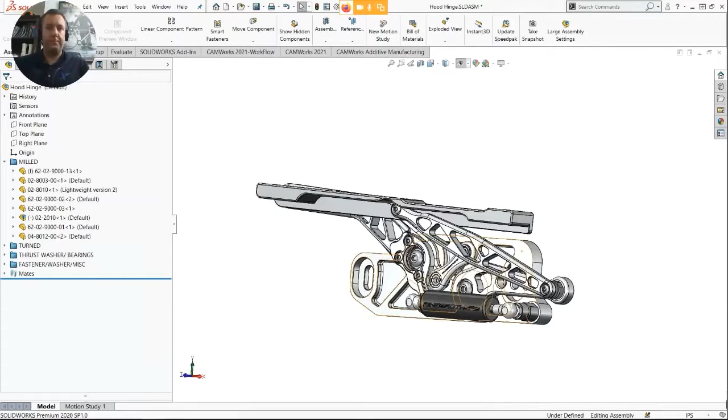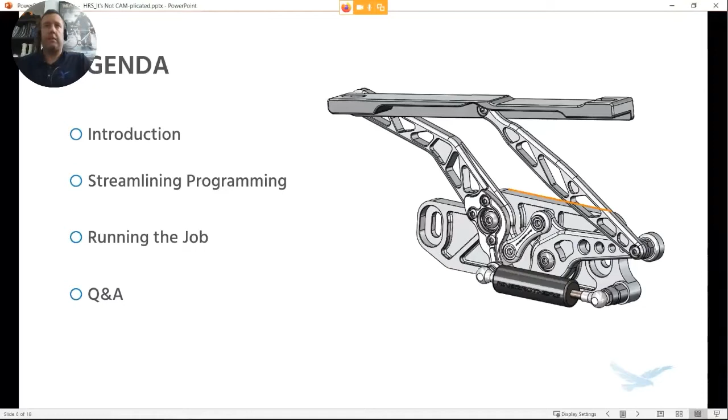Now, we're going to go through a few different areas of streamlining the programming and running the job, and looking at where we can save time in both of those areas. If we have time right at the very end, there'll be some questions and answers. If you have questions, you can ask them anytime during the presentation in that Q&A section, but if there is time at the end, we'll address any questions that have come up there as well.

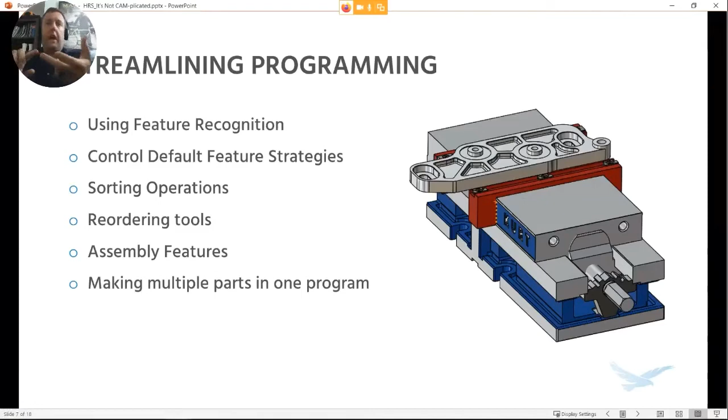So what are we going to look at now? Tim's going to walk you through using feature recognition and controlling default strategies. How do you sort operations quickly so you can minimize tool changes and structure your programs a little quicker? How can you resequence your tools? What are assembly features? And how do you make multiple parts in one program?

And then we're going to look at the running the job side of it. So how do you optimize cycle times using a new product called Eureka Chronos? How do you reduce the program size, and what methods and steps can you take to do that? How do you verify your actual toolpath is correct offline without having to tie up the actual CNC? Looking at actually programming with some variables.

Looking also at how you load programs from where you're working to the CNC, and how you can get the actual programs onto the control. And then looking at machine data collection and what we can do with that. So I'm going to hand it over to Tim, and he's going to take it from here.

Okay. We're actually going to turn our videos off to save on bandwidth while we're running these big models here for you guys live.

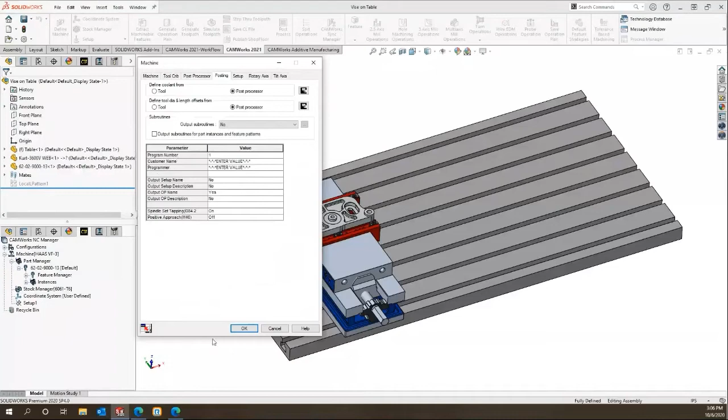So choose that - I'm going to set the stock manager next. This is where you get into some of the new features inside SOLIDWORKS CAM and CAMWORKS. This is the basic bounding box we've always had. Down here you have a predefined bounding box - I just have the default set as 1 right here because you can load whatever you want.

I didn't want to load a bunch of them and all of a sudden you guys open up your computer and it's not there. So I wanted to go through here - you can set your default, set your length, set your width. If you use a lot of 2x2, 1x3, whatever the case may be, you can actually set that information.

Another one of my favorite ones here is a cylindrical circle. You used to always have to take and set up a circle in here with a sketch - put the sketch in, then choose it as your circle. Now it just defines that, and you can modify this however you want, bigger, smaller, whatever the case may be. So for this one, I'm going to run this.

A trick here - a lot of people will go through and put different things in. This button is live, so if I put 0.1 in there and pick here, you can see it actually puts it on both sides as I'm doing this. So the game today is I'm going to show you what's new, and I'm going to show you a few tips and tricks along the way as well.

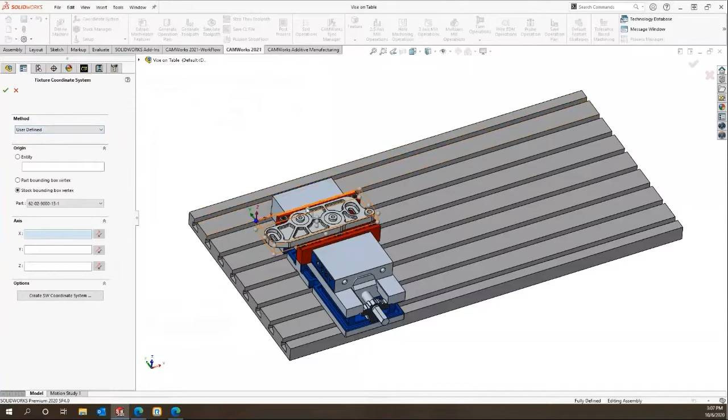Hit OK there. Next thing, my stock coordinate - I can choose just user defined, I can pick anywhere where these dots are, I can use a SOLIDWORKS coordinate, anything I want to set up any information inside this area as well. So I hit OK at that point.

Now the idea with the whole feature recognition is just to extract machinable features. If you go across, this one's lit up, this one's grayed out. As I push on this one, you'll now see it start going through the features - it's analyzing the pockets, the holes, the bosses. It's looking at the SOLIDWORKS feature tree and trying to figure out if I used the hole wizard to tap any holes.

So it's putting all that information in right now. And you can see I get a face feature, right? I get a perimeter feature.

One of the things I want to point out here is I get this default, which is rough and finish. In the past, you always had to right click, go through, go to the parameter, and come over here to pick the parameter you wanted to change it to rough and finish.

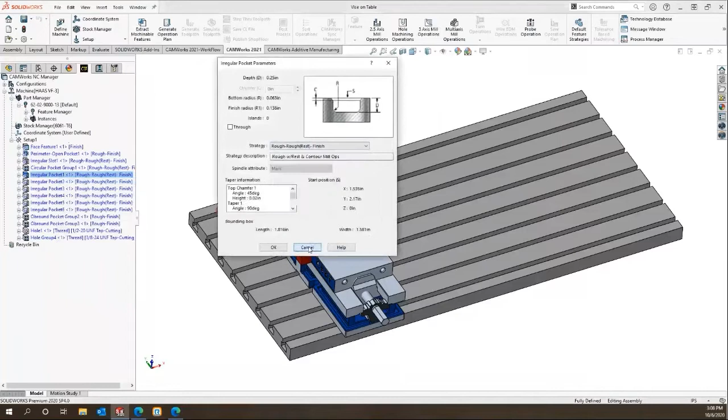So everybody had to do a shift, hold, whatever the case may be, to get through that. So what you can do now is just come up here to the default feature strategies and pick on this icon, and then you can go through and see how everything's all set up.

Everything that's in bold is what's being used over here on this side. So if I take my circular pocket, I pick it, I go to rough and finish, I take this one that's bold, rough and finish, and I can do this one as well. You can set these as your defaults ahead of time.

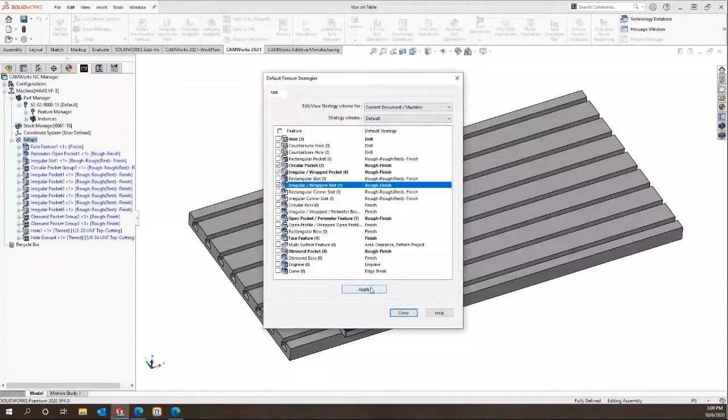I wanted to show you backwards in case you forgot, so you'd be able to quickly go through and change those. But you can apply these and save them to the database however you want inside here. I'm going to hit apply. Everything changes automatically, so definitely a time saver there.

Now what I'm going to do is pick the next icon. The other two are still grayed out here, right? I'm going to generate an operation plan.

So now it's going into the database and figuring out, based off an irregular pocket, what size tools will fit inside here and what can I apply. It's analyzing the size of the pockets, and it's also analyzing the tool crib and applying those tools. You can see it's got a rough and a contour, a rough and a contour, right?

The reason it does that is because back on this page over here, it says irregular pocket, rough and finish, irregular pocket 2, rough and finish. So you can drag and drop whatever you want in your certain order here.

You can also pick on the setup, and then by picking on the setup, you pick the sort operations. I just grabbed the sort button here. And if I want to do the face first, maybe the rough second, and then the contour third, right?

Leave the rest as the defaults. I hit apply, and you can see my screen now changes and it puts it inside there.

So now it's going to save all those tool changes. It's going to put the one tool in and do all the work, next tool in, do all the work. I'm going to hit OK now.

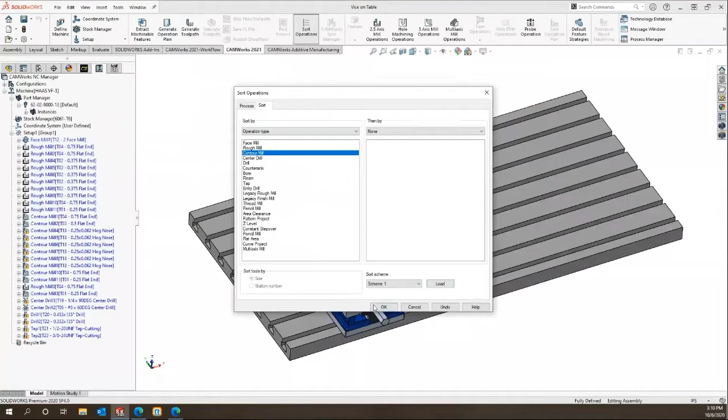And at this point, I can actually set up and generate my toolpath. If you notice, it's the next one that's become available now. So I'm now going to generate my toolpath, and then there's my toolpath now to run that model.

These toolpaths are defaults out of the technology database. You can customize the technology database however you want. If you like just doing it on the fly, like every other CAM system, you're more than welcome to do that. I can double click here.

And then I can choose what I want to do, right? I can change the tool, I can go to feed rates, I can go to operations. Everything becomes available, I can uncheck check marks.

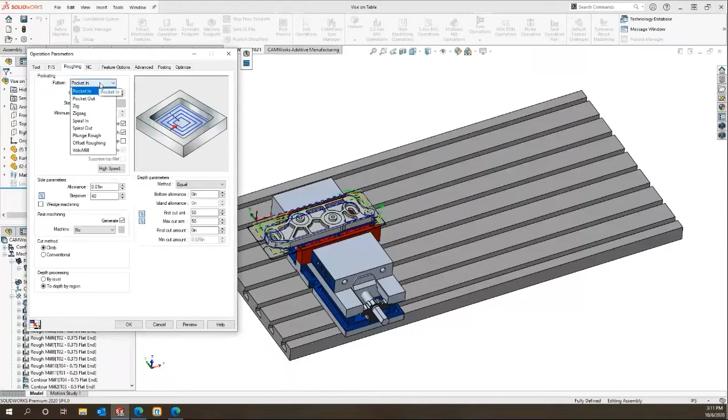And now I have information down inside there: my roughing, pocket in, pocket out, zigzag, spiral. It's all available just like anything else. So how I got there, I just double clicked on here and then I was able to make those changes.

So now if I wanted to simulate the toolpath, that's just the next button here. I pick on that and it launches the simulator. So you have different options.

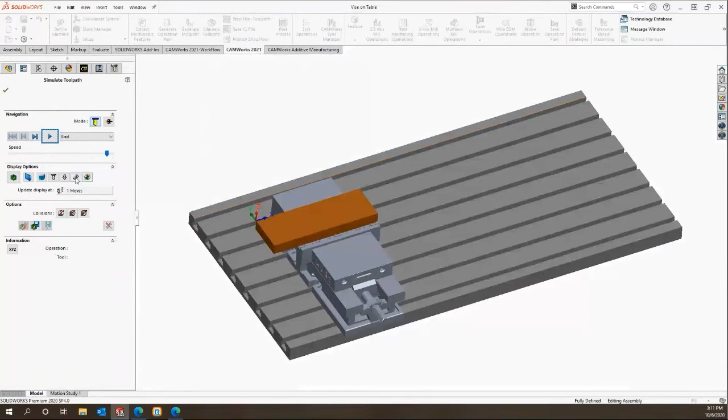I can see the part in here. I can go in and maybe I don't want to see the display, I can turn those on and off. So you have lots of options when you're actually running the parts inside the environment here.

So I can take that and just hit the play button, and it starts running my information and doing that inside there. I'm going to hit the checkbox now.

Now, one thing I want to do, we've got this new probing routine on this new machine we just purchased, so I want to be able to probe the part while I'm running it. So if I right click here, and I can do it anywhere, I can also right click at the bottom.

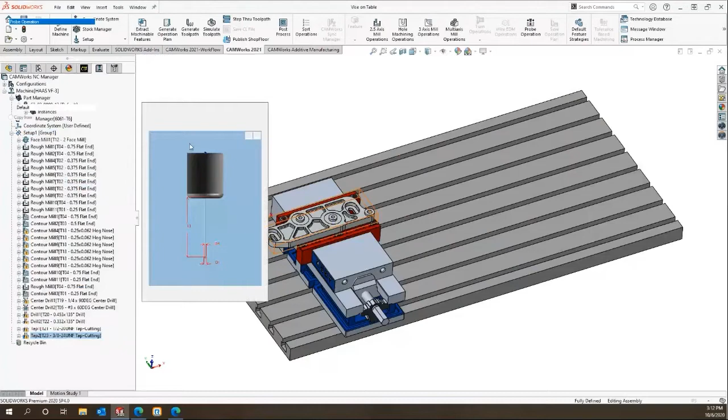It doesn't matter where I want to do it at. I'm going to put in a probing operation, so I'll pick that. I have my tool and I can select other tools out of a tool crib, and get different sizes, whatever you want to do. Hit the checkbox there, and now it's going to open up the probing window itself.

One thing I've been told is you always have to put in an actual raw stock out of the SOLIDWORKS environment to be able to probe the corner. So there's a trick to that - you do not have to do that.

Inside here, the X and Y location, you can choose right here and it'll just select the stock. And what it does is put in the plane on the farthest outside part with that 100 thou that I put on there. So I can do the same down here - I pick on that.

Now I'm going to probe the center, but I don't want to probe the center - I just want to probe the left corner up here. So just like any CNC machine, I've got X positive, X negative. I just take the X negative or positive here, hit delete, and now it just probes the one side.

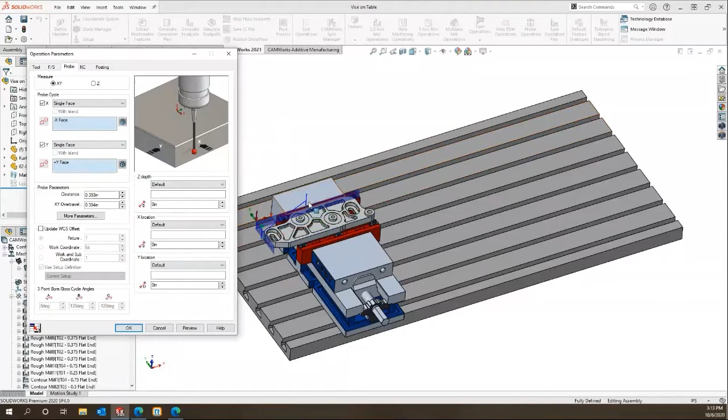I can do the same here, Y negative. Pick that, hit delete. And then I can move these wherever I want back and forth. So if I want to do the X, I just do negative 4 inches, and then it just comes back to the 4 inches of wherever it's going to be at. Very simple to do.

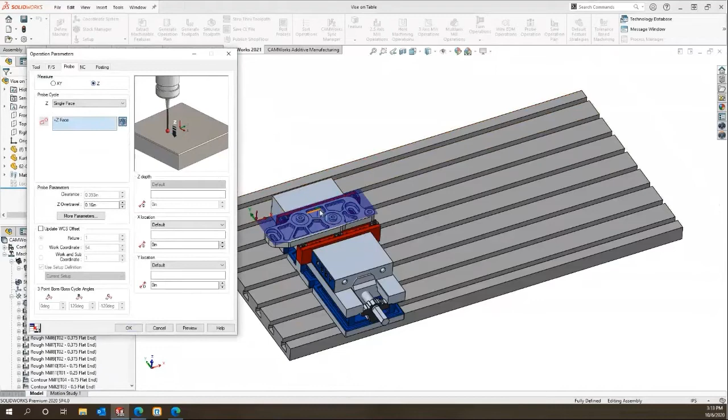And you notice it's set to X and Y right here. If I hit the OK button, now I can right click and insert another probing operation. Then on this one, hit the checkbox here, and all I want to do is find the Z. So I just pick on the top, same game - pick on the top here, and now it probes the top of the part. I can hit OK.

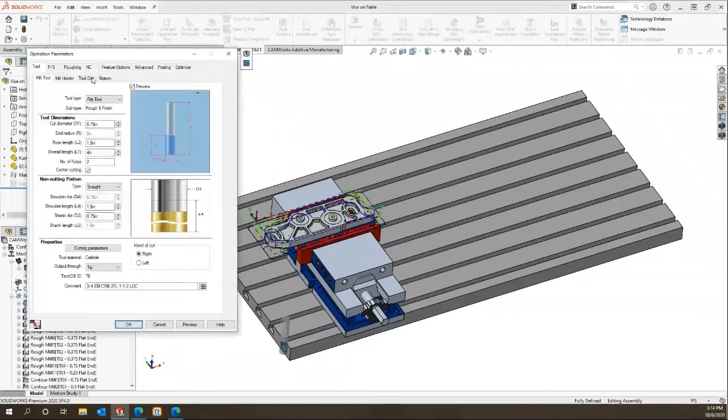One more quick trick before I turn this program back over to Daniel. As you can see, I have the probing all set up inside here. I can sort operations, or sort tooling, sorry. Sometimes people think you have to go in here and physically choose the tool - you have to go to the tool station here and change it to tool 1, tool 2, tool 3, whatever. If your machine is set up and these tools are in the right position where they're supposed to be, by all means, don't do this.

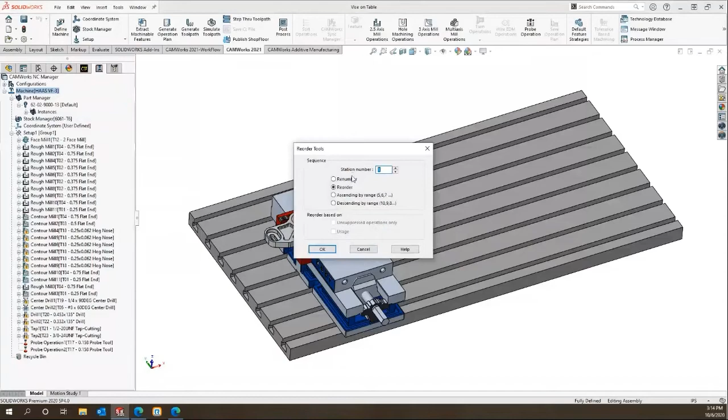But if you're just loading the carousel or whatever the tool changer is, the magazine, you can go through and get that all set up by just right-clicking on there. You can then go through and sort and reorder the tools. So if a job comes in, I can use tool 10 and up, or 5 and up - I'm just going to start at 1. And now I have tool 1 set up inside here with my face mill, as you can see.

Problem is my probe's at the bottom, so I still want to probe first. I'm just going to drag it, kicking and screaming, up here to the top. And now my probing is set up, and this program is ready to be programmed and run at the machine.

So hey Tim, that's pretty much a good job we're doing with that probing routine. I think we just took an order for 500 of these things, so we're going to need to take out every little bit of time we possibly can. I really thought we were just doing the setup, guys - I thought we were doing one. No, 500 apparently - sales guys going nuts apparently. Well, good for you then. You want to pass it over to me, and we'll see if we can take some time out of this. Yep, here it comes. Perfect.

So everyone should be able to see my screen now. I can see it. Perfect. So we've got Tim's program loaded up in a tool called Eureka Chronos. Now this is a new product. A few of you might be familiar with VoluMill. VoluMill is designed to optimize feed rates and remove a lot of material at one time.

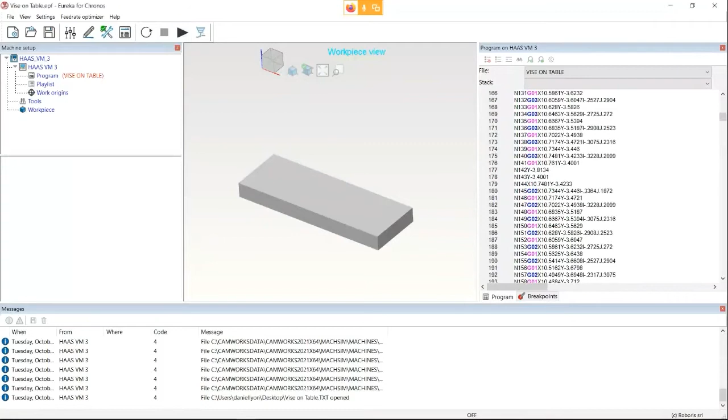What we're going to do here is take our program that's over here on the right that we just produced, and play that through here. Eureka is a tool normally built for doing machine simulation. But the nice thing they did with Chronos is they took the machine simulation and the existing path that you've got, and use this to check the actual tool path, to see if you're machining correctly, but also to make sure that you can optimize your cycle times.

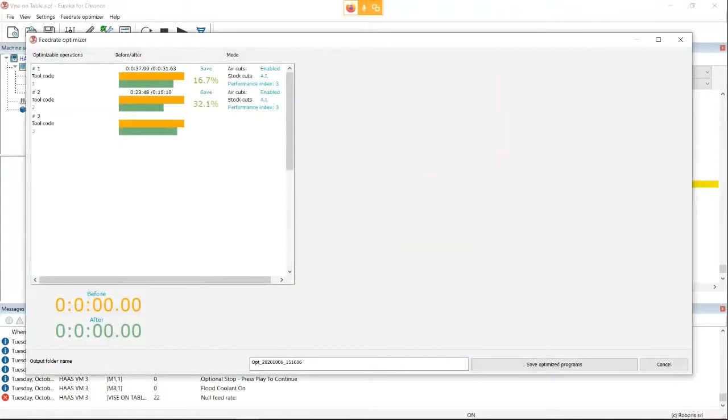Now, I mentioned VoluMill before. VoluMill is changing the tool path itself to be a different path based on the volume of material, so it's trying to optimize that material. What Chronos is doing is analyzing the actual G code that you feed it and looking at where we can save time by optimizing the volume of material that's being removed. Essentially the same thing that VoluMill is doing, but on every single path that we have.

So you can see on the left-hand side down at the bottom there in orange, that was our cycle time before. So at the normal feed rates for running this part, we've got a 41-minute cycle time. Now we can save 22% of that time by optimizing the feed rates. I'm just going to explain what it's doing. You saw Tim put in a face mill operation at the very first tool. Tim's tool one was his face mill.

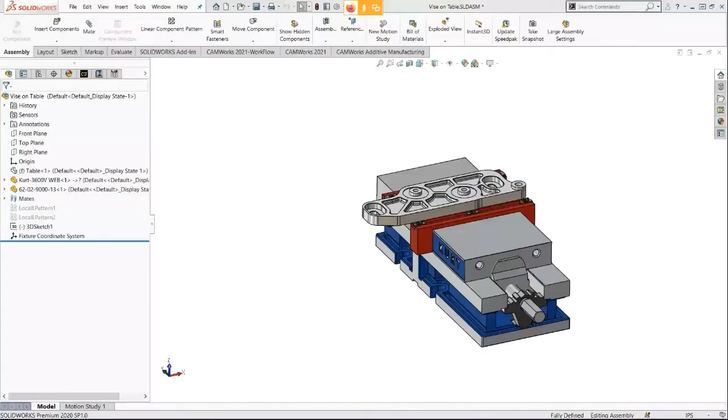You can see in the vise setup right here that we were doing a zig, then a zag, then a zig move coming across here. That corresponds to these three chunks right here. The orange section is before the optimization. The green is after the optimization. The bottom section is the volume of material being removed per minute, basically. So we do our zig move, then our zag move, then our zig move.

When you program these and lock the feed rates in, they're cutting at that feed rate throughout the entire cut. You might have a lead-in feed rate that's slower or higher, but as soon as you're in the cut, you're usually at a continual feed rate until the very end. The problem with that is, as soon as we come off the zig move and transition back to the zag move, we are essentially cutting air. So our volume of material drops.

But you'll see the orange line here. This orange line is our feed rate, the original feed rate in the program. You'll see that maintained its feed rate all the way through that pass. Now what Chronos is doing is going, okay, when you're air cutting right here, I'm going to optimize the feed rates by cranking up on them.

So it's going to use these numbers right here. We're cutting on a Haas, so we're going to set it to the Haas default. So 650, I think, is our maximum cut speed in a feed move. If I hit apply, we'll recalculate based on those new values. Now we're saving 15%, just in that one face mill operation. Tally that up across a number of operations, and you get a pretty significant time saving overall. So we're looking at volume of material being taken out and changing the feed rates to optimize that material removal.

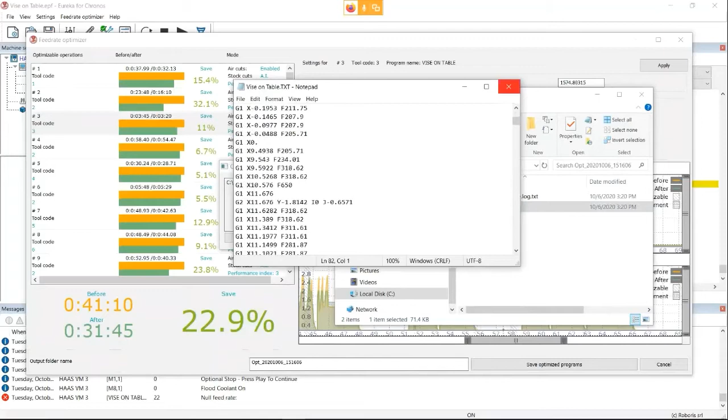Now, I don't think one part at a time is going to cut it if we're doing 500 of these, though. Tim, what do you think? No. Take a little bit more time. Yeah, you want me to reprogram it? Change this? Yep. Let's go ahead and reprogram it for doing the 3 parts instead of just 1. Did you say reprogram? Yeah. Is that not what you have to do? No. Dude, we're in SOLIDWORKS CAM and CAMWORKS. There's no reprogramming. Sit back and watch this.

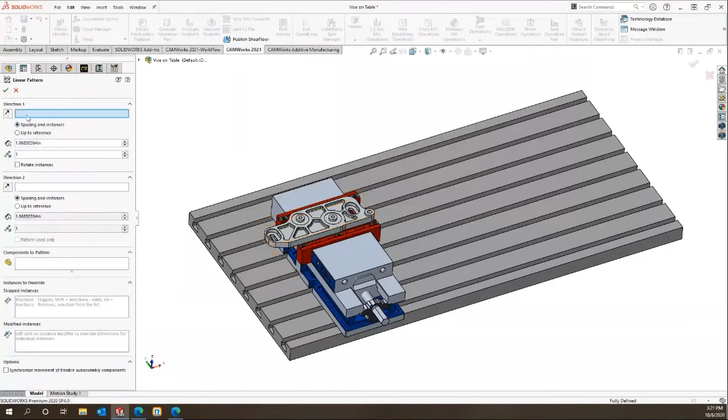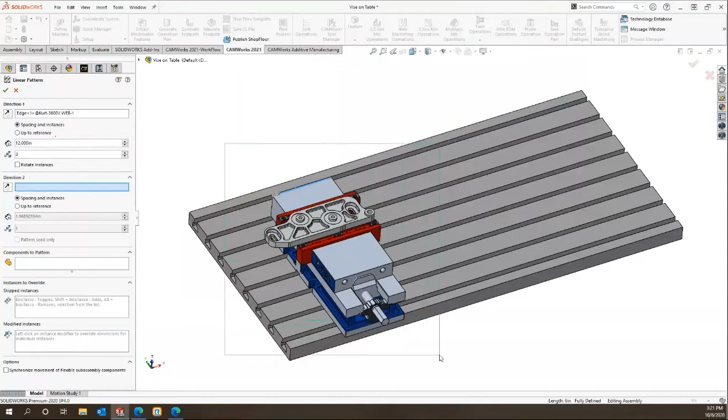Just going to go insert, do a pattern, linear pattern, right? What direction do I want to go? And this is SOLIDWORKS stuff, right? So I'm going to pick on this edge right here, and now I have my arrow going the right direction I want to go. Inside here, I'm just going to go to 12 inches. And I'm going to tell it how many vices I want. I want 3 total. Pick on that, and I'm just going to window select and grab those. Oh, I better pick down here first. Pick on that. And now I have the 3 parts going across there. So now if I hit OK, you can see I now have 3 parts, right?

Now we have the whole parent-child trick, right? So inside here, I'm going to go to Part Manager. I'm going to manage the parts. I'm just going to tell it that there's 2 more on the table. I'm going to select those. I'm going to hit OK. And then there is all your programming. So there's no reprogramming. We went from 1 part to production that fast.

So one thing I did think about, Daniel, is, when we're out saw cutting, I don't know if I want the saw person to go through and cut 3 different pieces. What do you think about just putting 1 piece in here? I think that's a good idea. Why have we got a CNC if we're not going to use it and we're going to have the guy cutting pieces manually by hand? There you go. That's what I was thinking.

So I'm going to go to the stock manager inside here. And then there's an option down here in the very bottom, right? I can choose all 3 of these. I'm just going to hold my shift key and grab these. I'm now going to combine the stock, change my instance here so it all becomes 1. And now I have 1 piece of stock to do the whole part.

So at that point, I can also change how I want to do things, right? I got my X here. I can set this to 0.05 on both sides this time. I'm going to try to save a little bit of material. This is still going to be the same because this is the raw material. And the Z will be raw material as well, so that will be the same. Hit the checkbox. And I get this new warning, right?

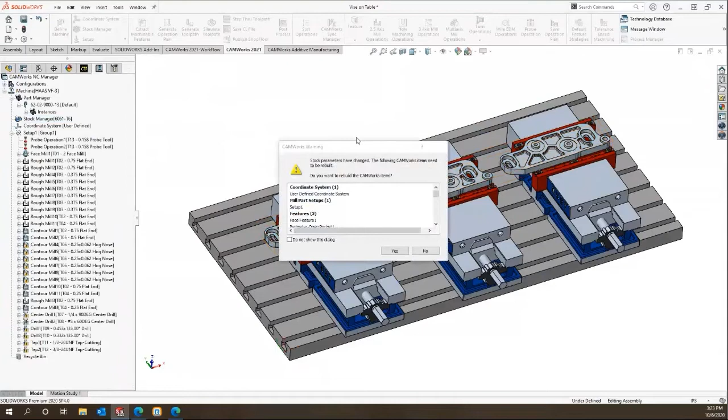This is in 2021. It says, hey, based off what you've done, you've moved the coordinate. So by moving the coordinate, there's a bunch of things that you need to change inside here as well. So I'm just going to hit the yes button. It's going to readjust my coordinate, and it's going to recalculate all my toolpath. And now my new toolpath is based off that coordinate.

One thing inside here is there's a face tool, right? A face tool, a face tool, and a face tool. So back in the past, you always had to kind of draw a sketch, and then you had to go inside here and you had to suppress the information that's set up. So what you can do is go up here in the instances and set this information. Let me go back to the right tree here. So I go back up in here, my feature tree, right?

And then here's my face feature to do that. And down here is all the 3 different features. So you used to right click and suppress, and then you could do what you wanted to do from there. A great feature: right click, assembly feature. So if you make it an assembly feature, it now takes that, and you've noticed down here, it turns it all to 1. So if you look inside here, when I double click on this, you will see my stock is now all 1 piece.

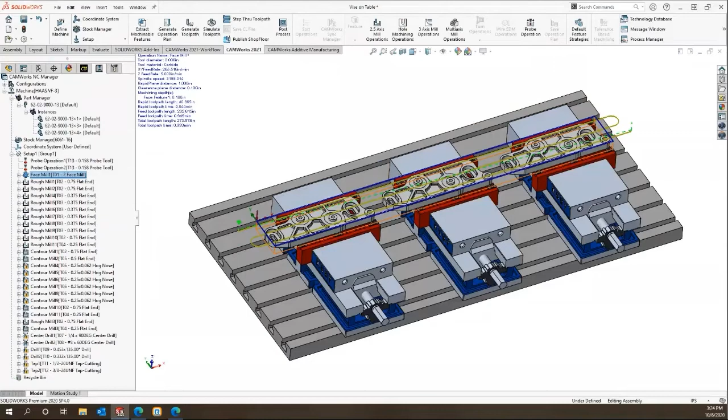My end condition remains the same. It's the 0.1 I had in it for the stock. I hit the checkbox, and now over here on the operation tree, you can see my face feature makes 1 pass across the whole part. So pretty simple to go from standard into real production real quickly. So I'm going to turn this back over to you so you can show the next part.

Perfect. Yeah, I love that option. I used to keep doing it the old way, individual face mill on each piece, and it was getting kind of tedious, right? So cheers for that. Yep. We'll drop it in the vault.

Yeah, everyone should be able to see my screen now. And what we're going to do here is look at where we can maybe save some cycle time. Now, if we've got 3 pieces on the table, obviously we're going to have 3 times the code. Now, these are relatively small, but if you've got a large program, the last thing you want is having triple the code for doing 3 of these pieces. So what we're going to turn on in our CAMWORKS is the ability to do sub-programs. Some people call them subroutines.

If you're using M97, that's a general term, M97P, and then a subprogram number or a subroutine number. Or if your post is set up differently, it would be an M98, and it would actually create a separate program rather than going to a line number. Both similar sort of deal, but you can now change these and control them whether they're based on operations. I think that was actually a 2020 feature, but it's a really nice way of doing it.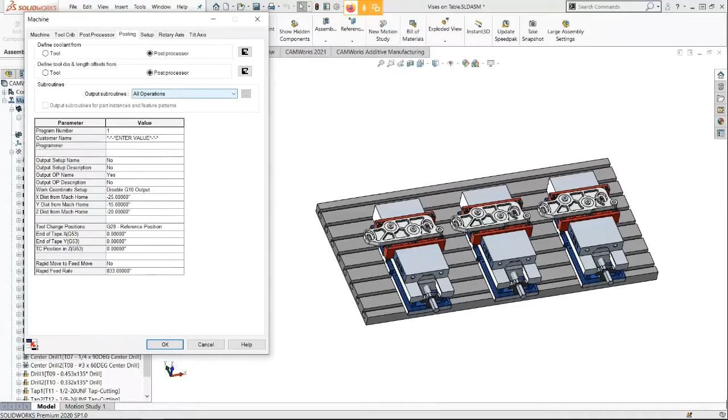Now we're going to do this for all operations. So it's going to basically run the first one and then loop through it 2 extra times to do the second 2. So rather than outputting 3 times the code, we're outputting 1 program and then looping through it a number of times. So we go over here, we generate our toolpath, make sure that's all up to date. And then we're going to check this out in the machine simulator. So I've got this set up to run a machine simulator. We're going to take our G code, output our code to machine simulation, and backplot it.

Now, a lot of people will often take the code that they're running, stick it on the real CNC, and tie that machine up from actually doing production work. And that's the last thing we want to do. That's an expensive machine, basically sat there, not cutting parts, testing out code. Now, if you've got time to do that, fair enough, but we don't. We've got 500 of these to make. So the last thing we want to be doing is tying that machine up doing testing.

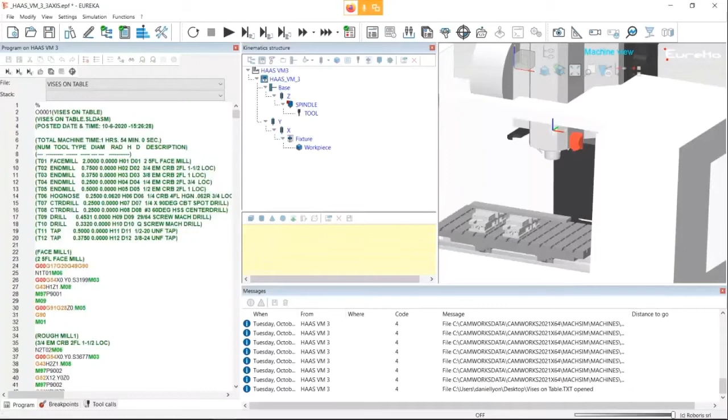So we've contacted support. We've had our post adjusted to support M97 routines instead of M98 routines. So now it's just going to loop down to the bottom of the program and loop through to this N number every time. So you'll see the face mill doesn't do that because we've got 1 assembly feature, and that's what that assembly feature is doing. It's just making it occur once rather than for every instance of the part.

But we still need to set our offsets in here, basically. So we need to control this. What I'm going to do in here is, you'll see the G52 command is kind of a standard FANUC command, but what it does is it kind of does an incremental shift of the work offset.

Now, you have to increment it to say X12, which is our next vise, and then X24. But before you go X12 and then X12 again, because that would be technically where 24 is, you often have to reset it back to 0 and then reset it back to 24 again, which confuses the operator. So I'm just going to replace all these, and I'm just replacing this right in the code.

And I'm going to switch it with G56. So that's going to be our third vise because X24. We're just going to replace all those instances right here. Obviously, I've been through this. I want to check to make sure that the instances and the work offsets are correct. But we want to basically go through and replace all those instances of X12 as well.

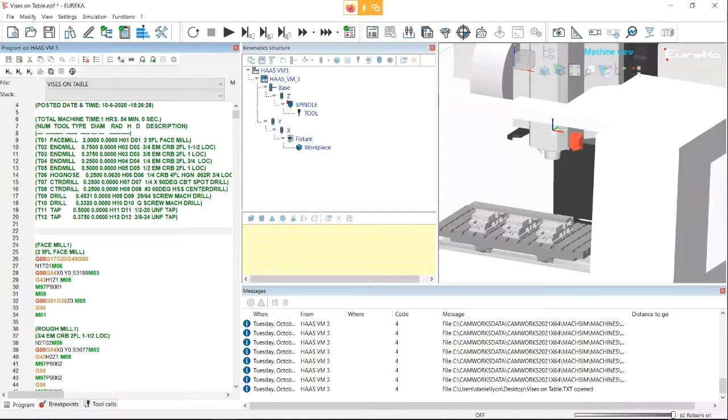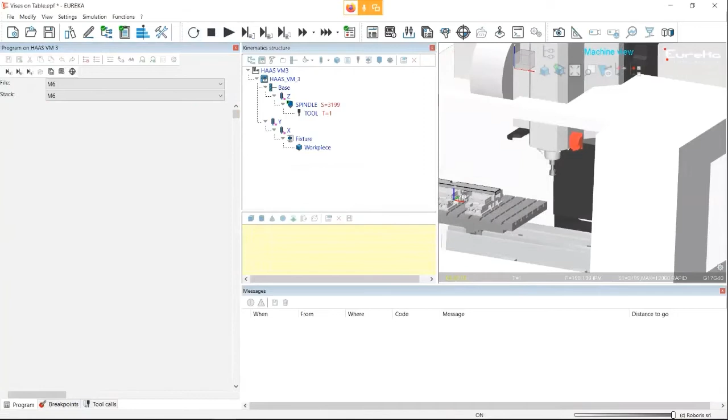I come up here, I hit add. Now I can actually go and pick the vertex on the stock itself. So I'm going to go and just set that corner as my work offset. It registers all the values over here. So I can reset that now. And obviously it's going to go and start cutting, facing that entire piece of stock and running through that program. But like I say, we need to kind of separate this into 3 separate pieces of stock.

So using some variables and macro programming, I've actually got a bunch of programs stored in the controller. We do this quite frequently. So I've actually got a macro that we've written using variables that automatically does a slot cut depending on a bunch of parameters. So these are arguments. These arguments right here allow us to control that macro. So it's like a canned cycle essentially for drilling. But what we're using is a G65 P number with a subprogram. It feeds those arguments to the program itself.

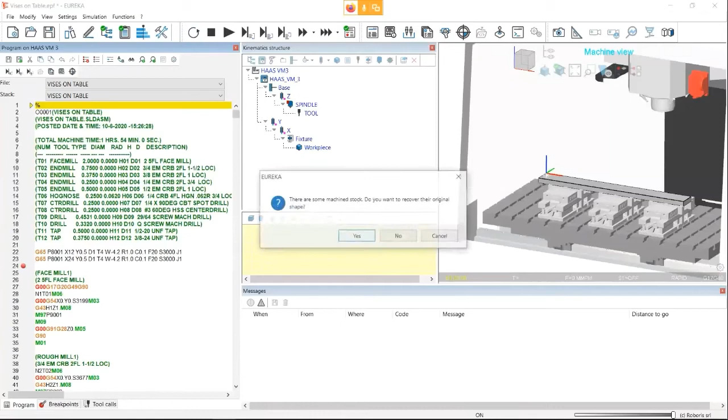So now what we can do is actually just paste those into our program right here. And I want one at, say, 24 inches. And basically now it's going to go through. We're going to actually stop it at this location. So this is also, if you're familiar with probing, how the probes work. It goes G65 P and then calls your 9000 or your tool setter program, and gives it a bunch of parameters to go check, like bore size and all the rest of it. In this case we're just going to use it for creating slot cuts on our particular part.

Now we're going to just play through that. It does a tool change. It does one, runs the other one, and then pauses. So now I can actually come back in, hit initial work offsets again. I can add my other 2 in here and just start going, okay, well, I want to pick the vertex here.

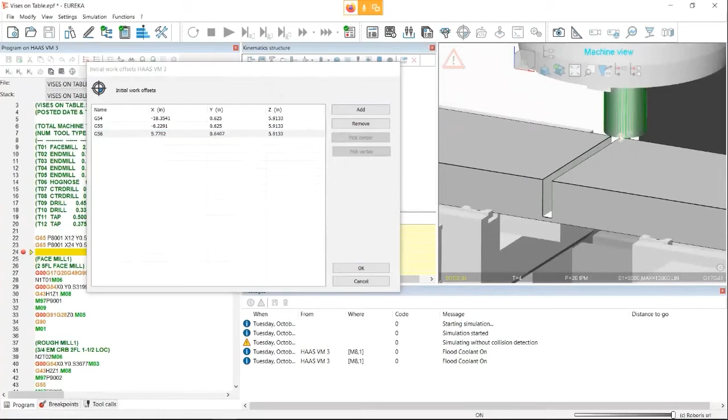Go and select a piece of geometry right there for G55. And then we want to go pick the vertex over here for G56. I might want to check the tool length there. It's a little bit close, but we'll call it good for now.

So we've just got the part set. We've got our work offsets set. We've got our work offsets adjusted in our program. But what else can we do? We need to run 500 of these. Now we can run things like variables. So variables, if you're talking Fanuc or Siemens or Okuma or whatever type of controller you're using, each has a slightly different format, but usually in your program manual, you've got details of the formats you use.

Now, Fanuc uses pound variables, so I'm just going to create a pound variable called 500. And then I'm going to say that is going to be equal to 0. Now, this is best just to see, basically to make sure that everyone understands it. You want clarity amongst everybody so that they see exactly what's going on. So I'm going to set this part counter to 0.

Then we're going to set another variable, and we're going to say this is the batch size. So of these 500, we're going to make them in batches of 27. So we're going to say #501 is equal to 27. But we've got 3 parts being machined each cycle. So we've got parts per cycle. And this is all stuff that you might be trying to type on the control, but we're doing it virtually here. Basically, we're going to create another one that's called #502 equals 3. So we're making 3 parts per cycle in this case.

Now, what we're going to do is get it to loop through this program just by making changes so that we get our 27, and then all of a sudden we've got our batch finished. So rather than having to run this several times, 7 or 9 times or whatever it is, we're going to go through here and loop it essentially. So what we do is right towards the end of the program, right where we get to our M30 down here,

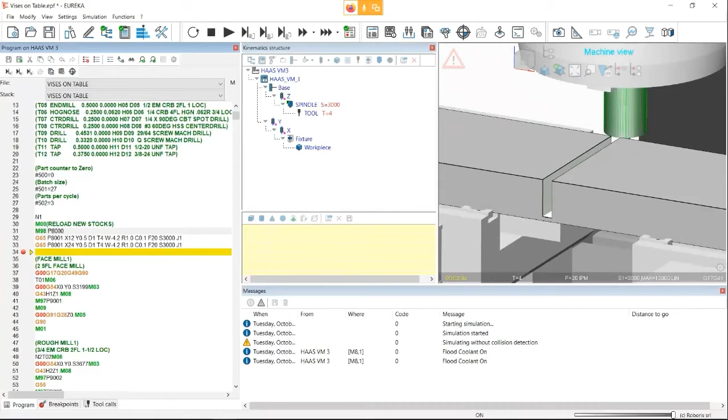Now you'll see if I reload this program up here, restart it, I've made a change to this program now. So it's actually updating that text file on my desktop. That's what those warnings are doing.

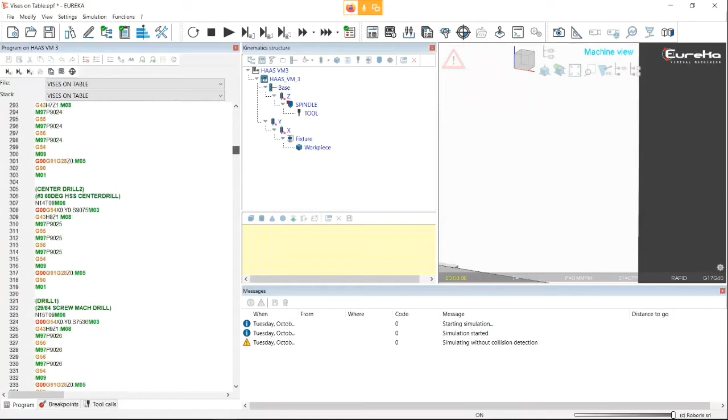And now we can go through the program right here. I don't know about you guys, but I hate sitting and watching simulations run, I get a little bit impatient. So I just want to quickly update the stock at this point in time and not have to sit there waiting for an entire simulation to basically simulate, so I can just get and see what the end result looks like. So now we should be cutting.

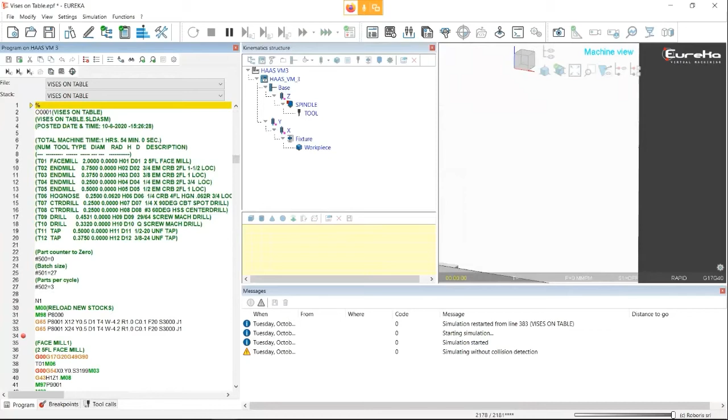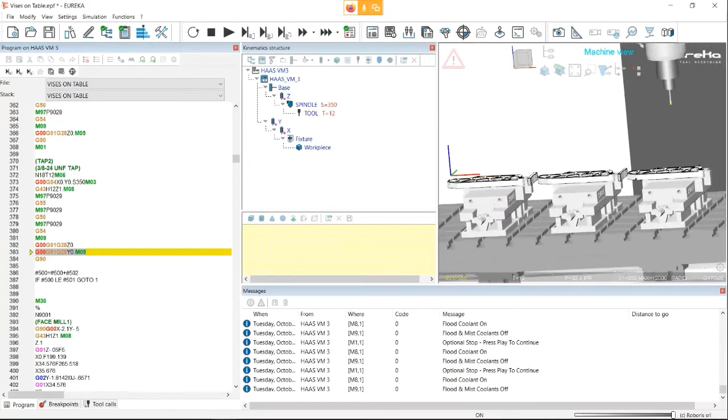Yeah, go ahead. So Daniel, I guess I have a problem with this, right? I just wrote all this inside the CAM system, and put all this together. I guess the good part is you didn't crash anything while you're playing it through here, and we didn't eat up the time on the controller, and we don't have programs everywhere. I guess my question is, with this, how do I know I'm running the right program? It's not going to come straight out of the CAM system now. How do I know you modified this?

Oh, well, we're going to store it all in the Vault, Tim. PDM, that's the solution for everything, right? The SOLIDWORKS Vault? We've got this. Yeah, the SOLIDWORKS Vault. So we've got this entire program here.

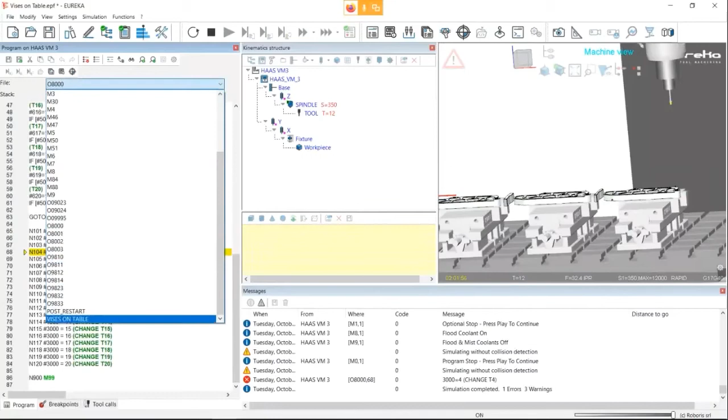You can see that it gives me an actual replication of the FANUC control. It gives me the 3000 warning here, change tool 4 because we hit that limit of 3 parts. But we've got this program right here. We've just made some changes to it. I got Control A, Control C, copy paste. We've got our Vault right here.

Thanks for checking that program in, but I'm going to check that out now. So we've got our program stored in our PDM Vault, just like any other file that we have in SOLIDWORKS. This one's specifically to text files. And I'm just going to open that up and basically just go Control A, Control V, paste in my new program, hit save, and then check that back in.

These programs can be associated to the revision, so you can actually associate them through the save as reference or copy as reference into the actual version of your SOLIDWORKS file, so the program rev matches SOLIDWORKS rev. So I just check in, I can put modified to add macro programming or whatever, dateline, date, whatever I want to do, just to kind of give it some information. So now that's stored in our Vault. It's saved, it's rev controlled, so that we know we can always go back to that original version if we wanted to. But now we've basically stored that in our system.

But now at this point, do I just get my USB key and pull it off the vault and put it in?

USB key, no, I hate doing that because Bill out on the shop floor loves to talk about his fishing trips, and I get to where I'm supposed to be going, completely forgot what I wanted to do, and I've already wasted half an hour.

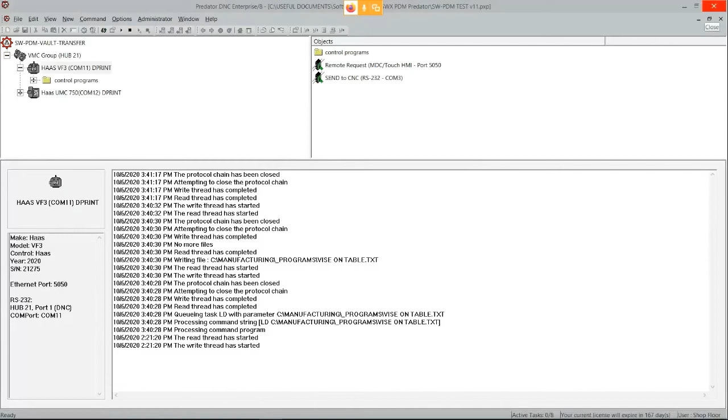I sent you that link. Can you open that up live and we can take a look at that and track where we're at? Yeah, absolutely.

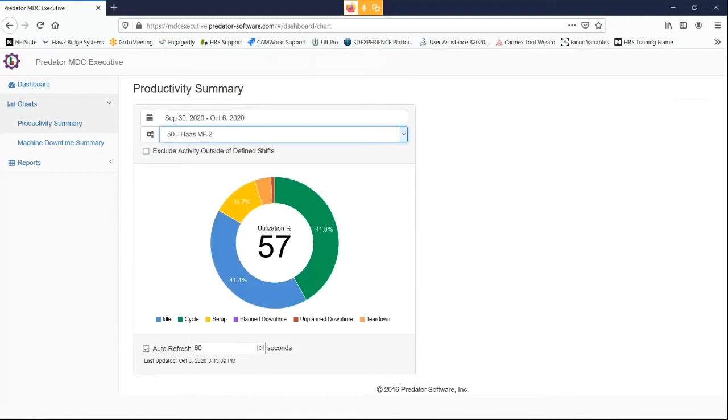Yeah, what we mentioned there, but I'm wondering if we need a new machine or not based off what we just saw for the last little bit on all the tools we have to make that spindle run more efficiently and longer. Yeah, exactly, the bosses are not going to like to see it live. How are we going to present this to them?

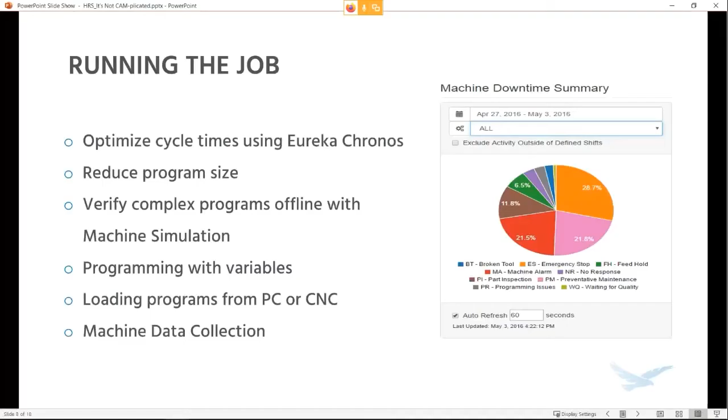Well, I've got one step ahead of you, I got a little PowerPoint. You know how those guys love PowerPoints. We've got our PowerPoint made here, a summary of just screenshots, quick and easy, quick and dirty.

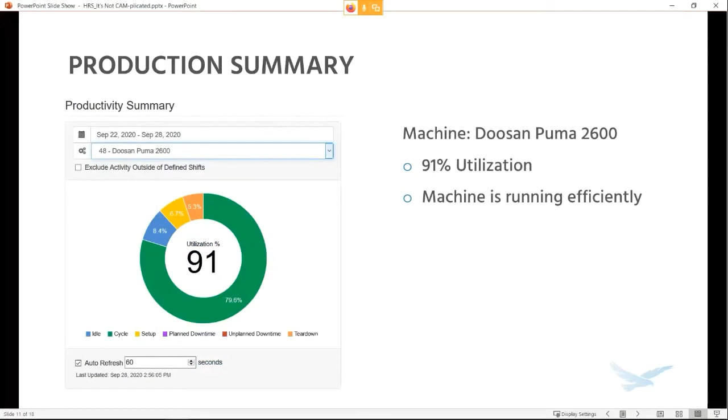That's how we roll. Basically, a screenshot showing cycle times where you can see, okay, we've got the Doosan's pretty efficient, 91%, it's running efficiently. Maybe we need to add another lathe or something like that just to make that less stressed.

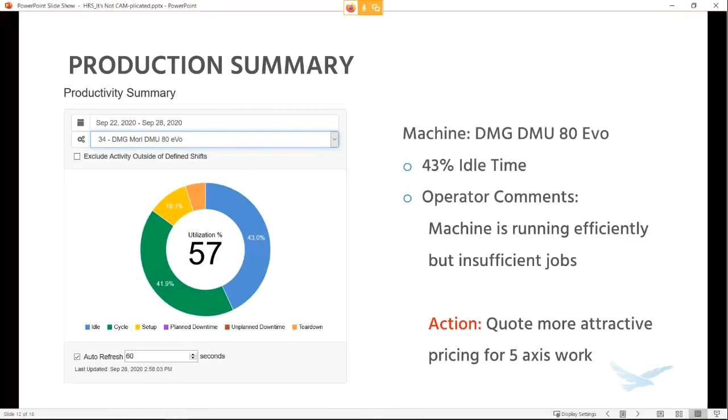But the Evo could actually be running efficiently, but we don't have enough jobs, or the guy's busy doing setup work or deburring stuff or something. We've got to figure out an action plan there. So maybe we look at quoting a little bit more attractive pricing so we can get some more 5-axis work in, things like that.

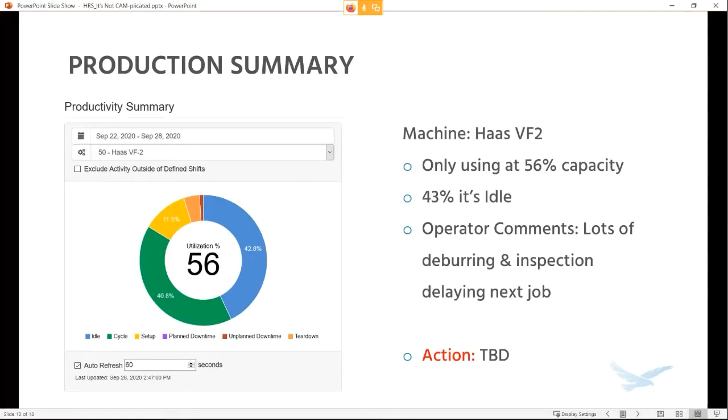That's better. So right here we've got our Haas VF2. It seems like from the operator he's doing a lot of deburring inspection, so maybe we need to crank up on, maybe get some machine in to do some deburring or hire somebody.

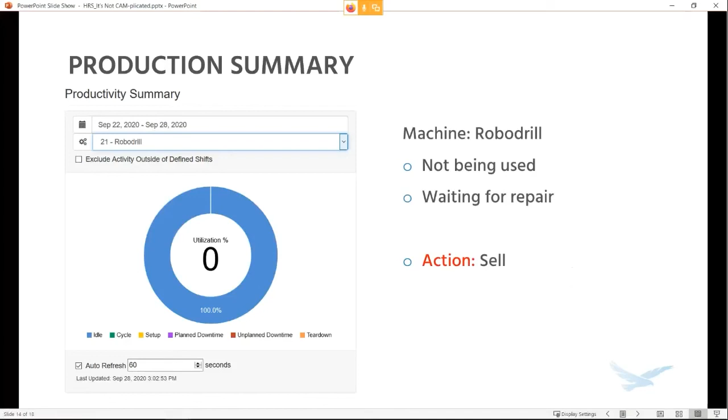That Robodrill doesn't look like it's being used, so we might need to, I think it's waiting for repair, and maybe we just trade that and get a new machine and offset the cost basically.

So to summarize it, basically give it to the management: be more efficient with our 5-axis, solve some issues in our facility to stop people deburring, or maybe deburr on the machine using some of the 2020 features for automatic curve feature selection. Maybe we need to hire someone and then we can get rid of our old equipment.

Sounds good. But did you hear the guys in the fab shop? I think they're getting a robot, right? Yeah, but if we get a robot, how are we going to communicate with it? I heard it has its own language. Oh yeah, they're nothing like G-code. I don't want to start learning a whole new CAM system again.

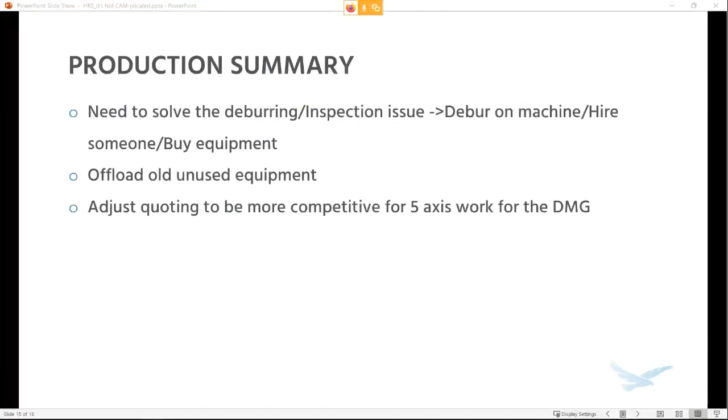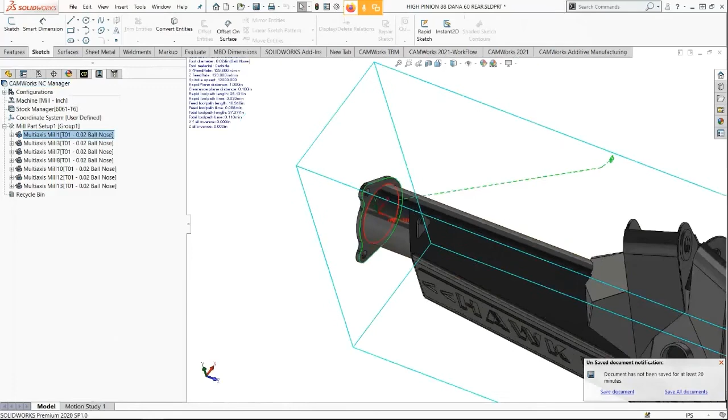Let's see if we can do anything in CAMWORKS. So we've got our robot, we've got our diff housing here. Actually, we've got a nice Hawkridge Systems diff housing that we need to go and weld up. So we've got the guys in the fab shop sitting there cutting this stuff and manually welding it, when we could be welding it using CAMWORKS and a robot.

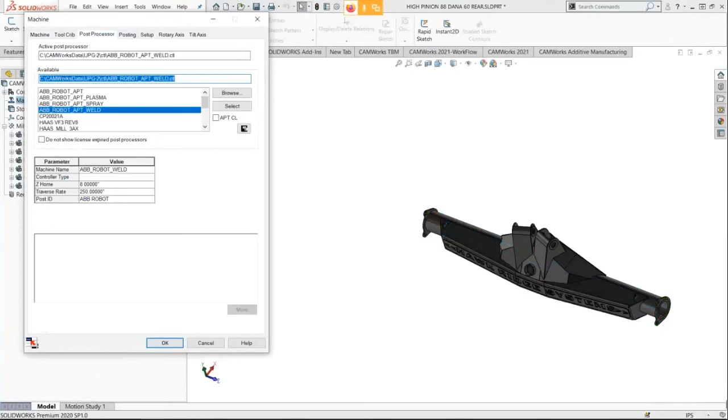So we've got all of our multi-axis toolpath right here to program the welder. I've got my machine simulator right here using Eureka. My machine definition over here is now my welding robot, and my post is now an APT post specific to the welder. We can also do robots that spray, plasma controls, and things like that. Right here, I can come in and output my code to Eureka, and we can post-process to the robot through Eureka while doing our programming inside this environment.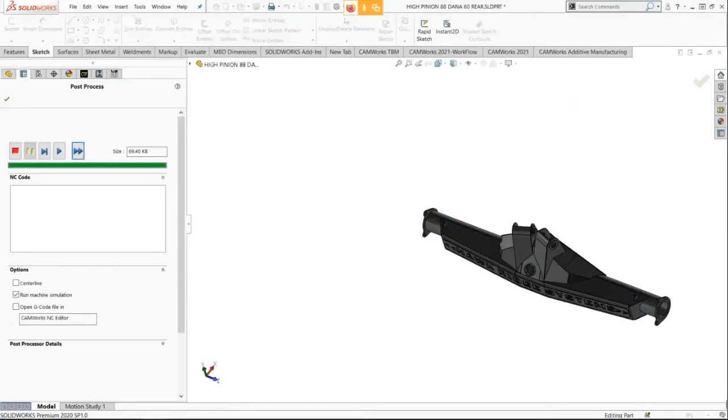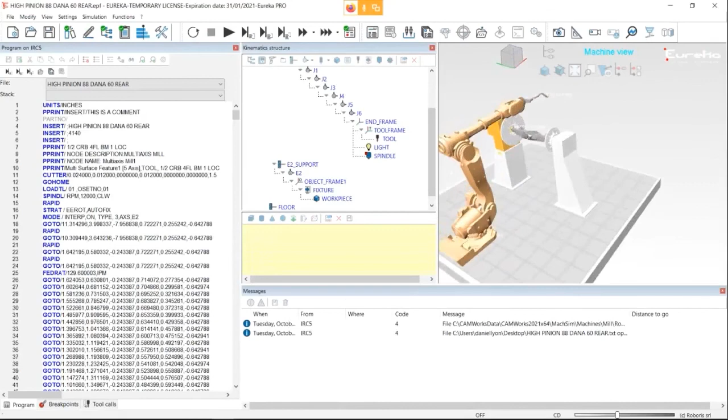So we've got our Eureka now configured to do robots. This has our controls in here. We've got our full robot with an external axis in this case, so we've got a rotary table that our axles are centered between, but we want to go and weld these up. Maybe it's all been tacked up already. I want it to go and weld those flanges, starting with the edge flanges right there where the brake calipers mount.

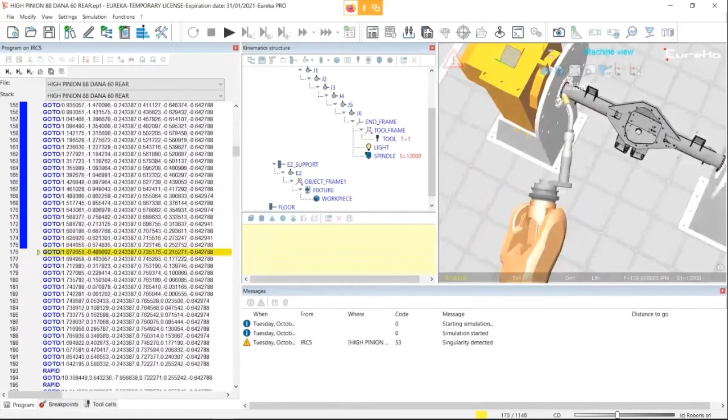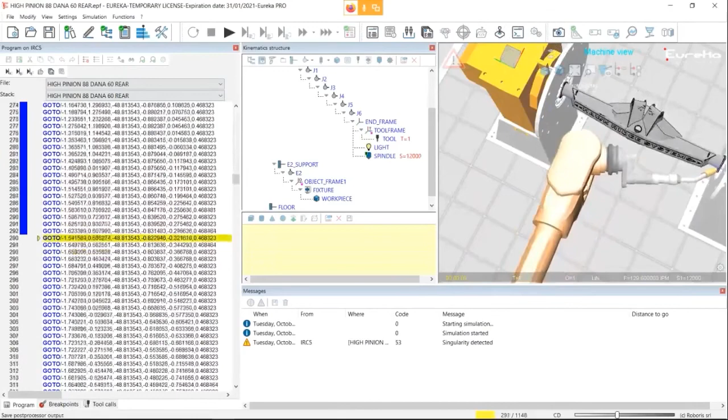You can see it's rotating. It's not only positioning the robot, but it's actually rotating the rotisserie as well while doing the welding. Once this program has gone all the way through, we can output our code to the robot through Eureka. Using this gear icon at the top, we can post-process to the move J and move L commands that the robot understands. We can also control the movements of the robot, including the approach. You can see here it's welding along that main seam, comes up and over.

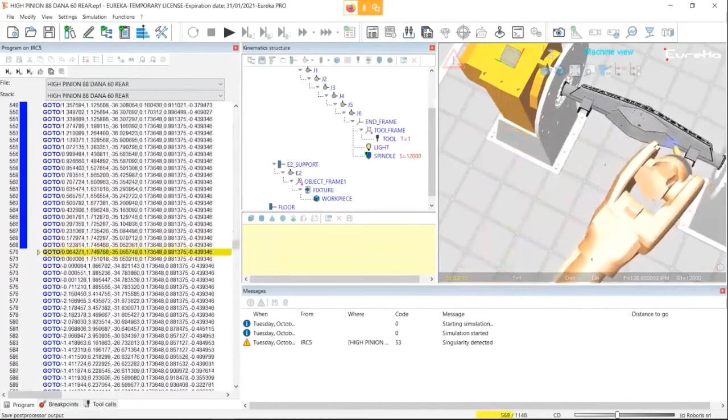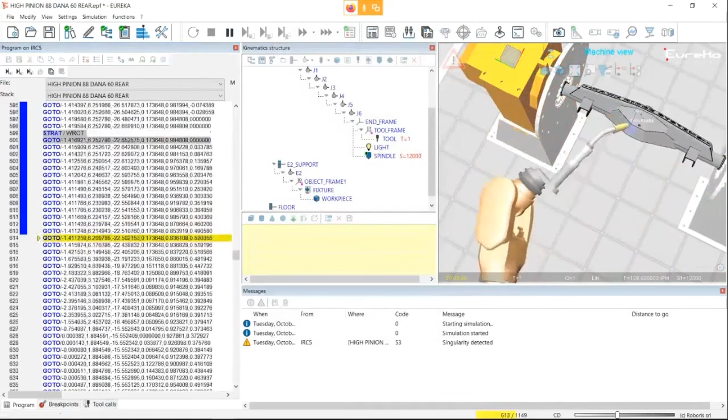So you've taken the code straight out of CAMWORKS, put in lines of code with a curve feature, however you did it, and now you're putting that into the robot and making robot code. Exactly, yeah. We can change how that code looks by using the functions in Eureka. Now you'll see it actually rolls down here, and we've just put in a new command to change how the machine and robot articulates, so we get our weld done nicely and efficiently.

That's excellent. So obviously we can simulate all of our high-end complex equipment as well—B-axis lathes, all the regular stuff that we're used to.